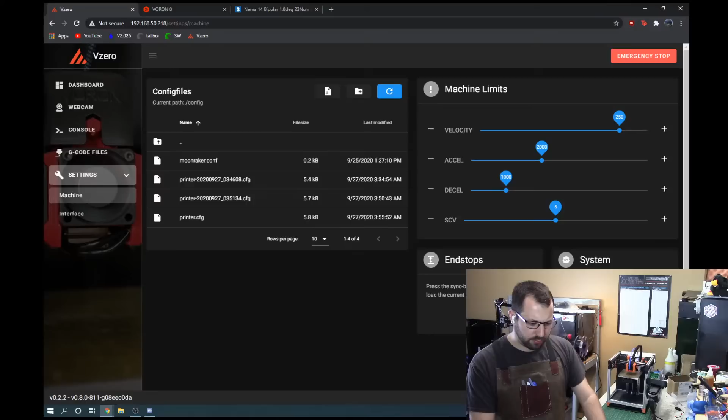So just start conservative and bump up until you have issues, then bump it back down. So I think we're okay there. Save. Firmware restart. Or was it restart I got to hit? I can never remember one or the other.

Okay, so we are good there. Home all.

Am I COVID-19 positive, no, but I do have a child in daycare. And when you have a child in daycare, they bring home the sniffles constantly, and you get it. More Canadian whiskey after the stream.

Okay, so what we need to do right now is validate our extruder extrusion, okay? So hopefully it's in the right direction. I wired it up like the default config, and I'm using the default config itself. So when I tell it to extrude 10 millimeters, it should at least push 10 millimeters.

Now, the easiest way to do this, if you have a Bowden setup, feed the filament, unhook the Bowden tube, feed the filament through so it's out, snip it, and then just tell it to extrude 100 millimeters, and then just scale off that.

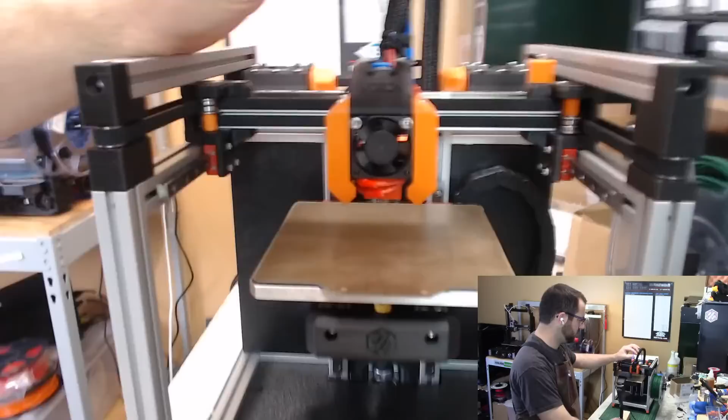So let's do this. G1 E 100 millimeters F90. I should have told it to go quicker. This is going to take a while. I should have put 300 instead of 90 or something.

No, it's still going. I told it to extrude a lot slower than it really should. And by a lot slower, I mean like god awfully slow. But it's extruding, so we're good there.

Are we done? Okay, I think we're done. So you tell it to extrude 10, I would go F like 300. You don't want to go too fast, because if you grind filament, you're not going to get an accurate reading. Same if you're skipping steps. You don't know if your extruder's tuned right yet for the rate of amps. So if you try to push too many steps per second and it starts skipping steps, and then you tune your extrusion steps based off incorrect data, yada yada yada, just go slow at first.

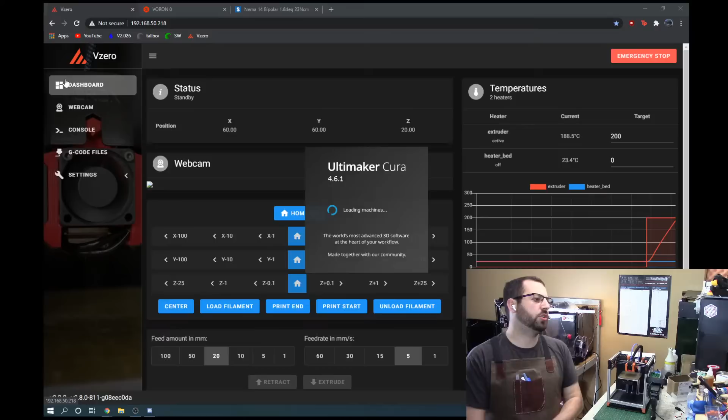Some sites say to measure through the heated hot end. Is that wrong? I've always been of the thinking that you want to give your printer the data raw. If you're extruding the plastic through your hot end and measuring based off that, you have issues with pressure at that point. Depending on the temperature of the hot end, the different types of plastic, the back pressure, how tight your gearing is, you're going to have a different amount of pressure for how much it feeds. So if you use that as your basis for measuring, you may be incorrect.

Versus the way I did it here, where there is zero pressure on the system at all. It is literally just moving filament through a Bowden tube, least resistance. So when your printer thinks it is extruding 50 millimeters of plastic, it is extruding 50 millimeters of plastic. If it's not giving you what you want in the result of the print, you change other slicing or other settings. But you shouldn't adjust your setting to compensate for something else that's throwing off your data, if you get what I'm saying.

It's kind of like adjusting your E-steps based on a printed part. You print out a calibration cube, and you start adjusting your steps per millimeter because your cube is 20.3 millimeters instead of 20 millimeters. Now, is that 0.3 millimeters because your flow is out? Your filament is not exactly whatever you plugged into your slicer. Your steps per millimeter for your extruder is out. The temperature wasn't correct when you printed it, so it expanded more, it shrunk more. There's so many variables involved.

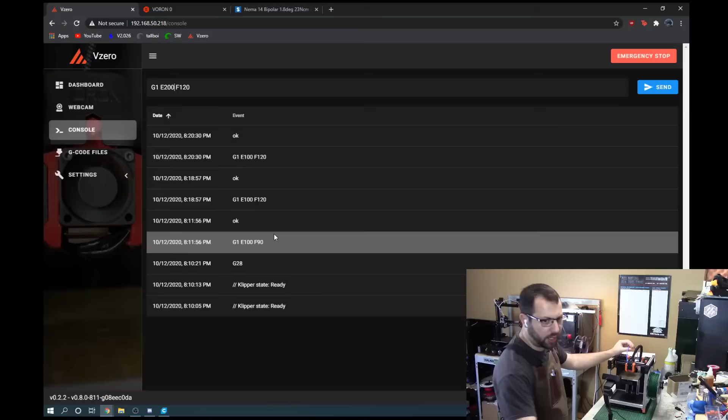Oh, I know — it's because it's already at 100. It's going off of absolute, so there we go. I forgot about that. A G1 move is moving to a location. So if you tell it G1 E100 F whatever, it'll move to E100. There we go. So if you try to tell it the same command again, it's already at that position. Yeah, it's in absolute mode.

So we are pushing some plastic out, some delicious green plastic. Okay, so we are good there. Set that to 0, and what I'm going to do is back it off. No, wrong button, I don't have — oh, extrude, there we go. Extrude 1 millimeter. Retract. I don't know why it's not letting me retract.

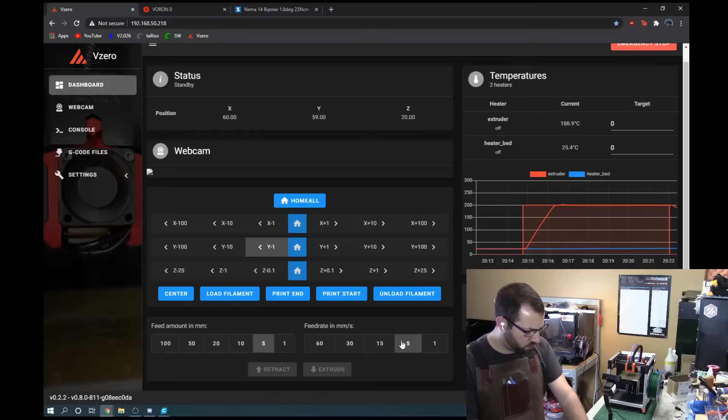Oh, because the hot end's off. That's why. Okay, whatever, good enough. Skip it for now.

So we have some plastic here, I'll get rid of that. There we go, good enough for a serial, boys. I'll take it.

Okay, let me catch up on chat here. Thanks for a quick question: I'm building a Voron 2.4 and I have a few BTT GTRs laying around.

So it calls for a Raspberry Pi 4 and SKRs. Everything you see in our recommendations is stuff we know works, okay? This guy has a Duet in it. The switch wire calls for a mini E3. Mine has an SKR 1.3. Tall boy down here on the ground, which you can't see, has a Taco Raven in it, which is a custom board we kind of designed like a year and a half ago that we only ever made like 20 of, so that's fully custom. And yeah, basically we recommend that, but if you already have hardware and you know how to set up a configuration, you can use whatever.

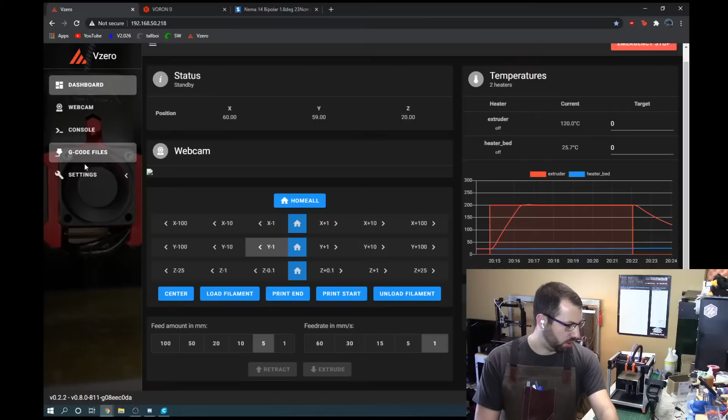So if you want to use GTRs, you can, you just got to know the pinouts. So when you go to do the configuration, in your printer config section, and you see these enable pin and direction pin, you know what pin you have to put in there to get the command that you want, essentially. So it's not complicated, and yeah, you can use a Raspberry 3.

This guy has a Pi 0 in it, so if a Pi 0 is running it fine, you can use a Raspberry 3. For Octoprint, a Pi 0 I would only recommend with mainsail.

Is there a way to get the old interface in Cura? I don't know, I've always used like the most up-to-date one. Actually right now I'm using 4.5 on my main computer, and this guy has like 4.6 installed.

Just reapplied my heater to my bed today. RTV is the messiest substance known to Earth. Tell me about it, I used to build hot-end silicone heat socks out of them. I have it somewhere... but yeah, I've... oh, here it is. Yep, I know that feel, bro.

What do you think of the Nova hotend? Which one's the Nova again? Let me Google that, I've looked at so many different designs.

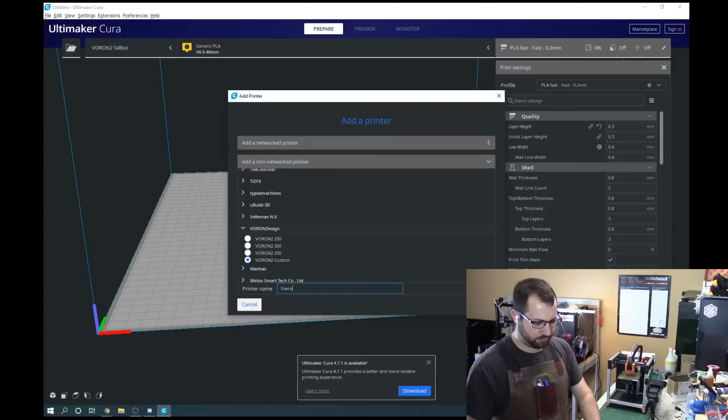Now, a lot of stuff applies to different slicers. Most of the settings are the same in different ones, they're just located in different areas. I like Cura because there's a ton of settings in it, you just have to know where to look for it. So we got 120 millimeters cubed. And yes, this is a slow computer. So for some reason, this part Cura is just horrible at, because it has to re-render the print volume or something every time you change one of these.

People will buy it because it's E3D, that's pretty much it. Honestly, my dream hot end, take a Mosquito heat break assembly because I like their form factor for the heater or the heat sink itself, which the rectangular kind of whatever they have there, not the circular one. So that, and put basically a V6 block, but mounted the same way a Dragon block is, so it's fixed with the thin heat sink. That's all, or a heat break. That's all you got to do. It doesn't need to be super complicated.

And keep the current nozzles that we use, unless they somehow come out with a better nozzle design. But I don't think they will, because of thermodynamics and the sizes we have to work with.

Rectangle bed, heated print volume, no. I don't know, every time I select RepRap it throws an error when it prints, so I'm just going to pick Marlin. I don't think it really matters.

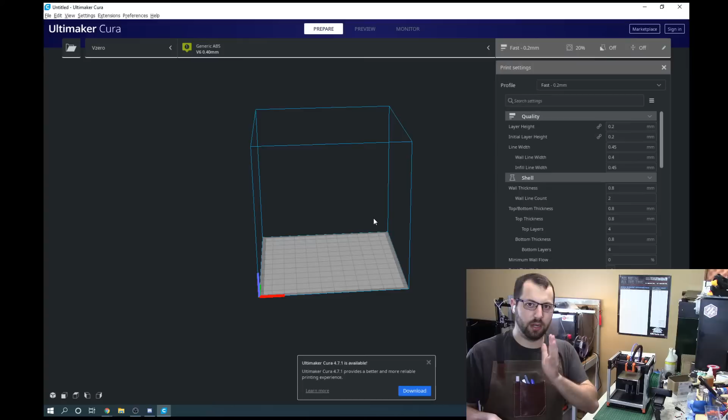So I haven't done input shaper, I haven't done tuning for the pressure advance, which we're going to have to do because this is a Bowden - short Bowden, but a Bowden. So what we're going to do is, plus thinner nozzles, steel is...

Triangle Labs, OEMs—no, I honestly just think it's one. There's probably only a few companies making stuff. Triangle Labs isn't the OEM, I do know that. I do know who makes a lot of Prusa's stuff though, and they might have a vendor channel.

So this is how I like to set things up. I'm one of those people that likes to give as much raw data and then adjust what needs to be adjusted. Everyone says your line width should be bigger than your nozzle, but that's your nozzle. So if you want to make 0.4mm lines, you tell it you have a 0.4mm nozzle, and if your lines aren't touching, you adjust something else. That's personally how I do it. I don't tell it I have a bigger nozzle than what I have. If I have a 0.4mm nozzle, I tell it I have a 0.4mm nozzle. So my line width, I go 0.4.

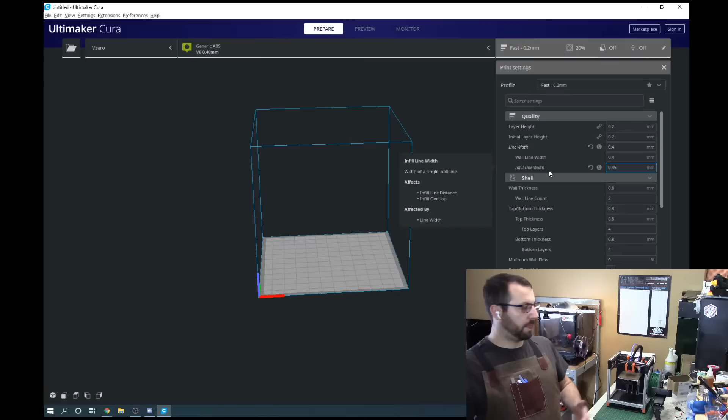Now something like infill, I over extrude for sure because it's infill—that's a lot of strength. So I over extrude infill, but my walls I make to data, and then my parts always come out good. I pretty much never really need to tune once I get everything dialed in.

Yeah, LDO. This has a Prusa bed, but I bought it from LDO. In that case, John, use metric.

Okay, so wall thickness—this is how many walls you want. So we're going to print a ye olde Cali cube, so we'll go with 2 walls, top layers, bottom layers. If you're printing Voron parts, all the manuals tell you the default settings. We're just printing a cube, so we don't really need to worry there.

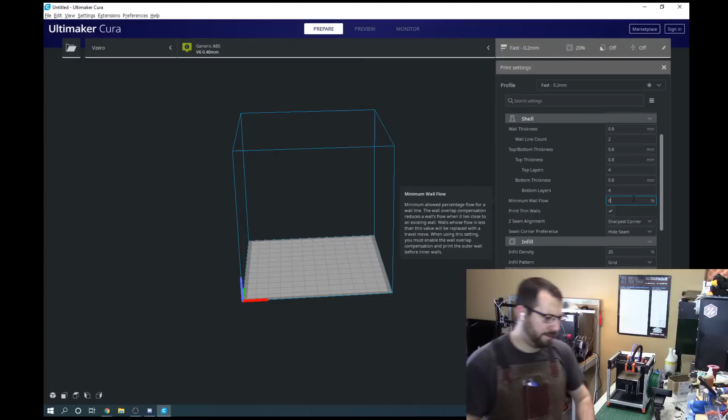Minimum wall flow—now this right here, I got to read this because I remember I had to change this for a good reason. I think this has to do with gaps, and I was having gaps at some point, so I've always put this at like 50, I believe. It's percentage flow for a wall line. I think this has to do with if you have 2 walls that come into each other—this just makes sure you get the correct amount. I was having gap issues, and I think this corrected it a while back.

Z-seam alignment, this is a big one. Whenever you see a print, depending on what you're printing, you may not care where your seams line up, where your start and end is. The better tuned your printer is, the less of an issue start and stop is. But what I like to do is just tell it to be the back. Unless there's something I really don't care about, I usually specify it to the back of my printer, and then whenever I put my parts down, I orientate them so my seam is on whatever part I don't care where the seam is.

So if I'm printing, you know, a little Charmander here, right, I'll have my seam in the back. So everything on the front, I never have to worry about a blob showing up in a bad spot because I know it's in the back. So personally that's what I do—I set it to the back unless it causes an issue, and then I'll set it for random or sharpest corner.

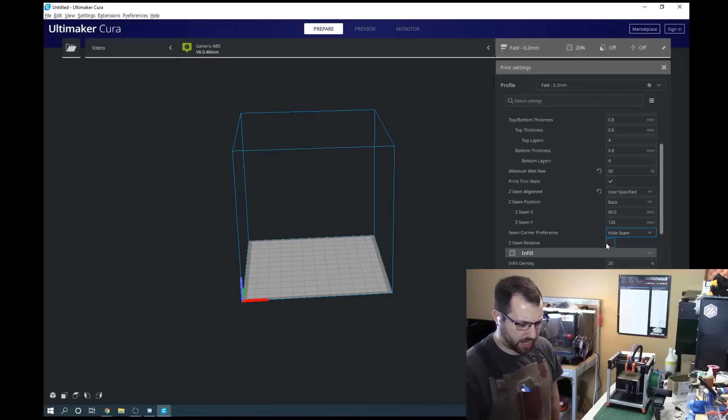So Z-seam, I usually put it in the back, and hide seam—yeah, seam relative, turn that on. This way, no matter where the part is on your print surface, it'll always be at the back. Personally that's what I like.

Infill—it depends on what I'm printing. There are basically three. Grid is probably the quickest for the most part. Cubic is pretty much grid, but it does a fancy pattern where it basically makes sideways squares, diamonds essentially. I'm a fan of cubic on infill heavy prints, and grid for just cosmetic stuff where you just need support. But my big favorite for a low infill percent print is gyroid.

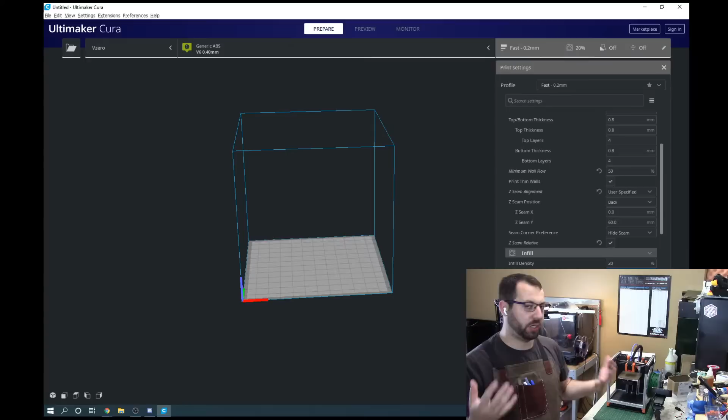Gyroid I found because of its curviness. If you're printing something big but you have low infill, either because it's such a big model you don't want to use a crap ton of filament, I find because of the weird pattern you have a much better chance of it being where you need it for other stuff to lay on. That Fantasy Castle print everyone prints works really well with low infill gyroid—everything just kind of lines up perfectly. But high infill, your printer will shake like mad, so cubic and gyroid are my two go-tos: cubic for high infill, gyroid for low.

Since we're printing a cube, we'll do gyroid at like 10%. And actually, let me throw in a cube here—I'm pretty sure I downloaded one at some point.

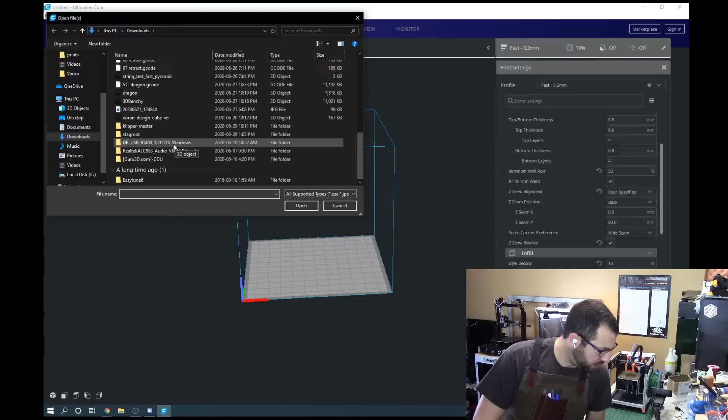Benchy? No, not Benchy, everyone's seen a Benchy. Do I not have the cube downloaded? I could have sworn I had the cube downloaded. Huh. Nope, I do not have the cube. Oh no. Mini Mando helmet.

Why do the mini one? Oh, I'm wearing glasses. Yeah, why do the mini one?

I printed this thing like 6 months ago. I still haven't finished it. It's been sitting primed, I gotta sand it all to hell, get all the layer lines out and shine it up. One day I'll get to that.

Okay, so community, GitHub. STLs, test prints, Voron Design Cube. Download it. Gyroid. Okay, so we have the cube downloaded. This thing takes up like the whole print volume.

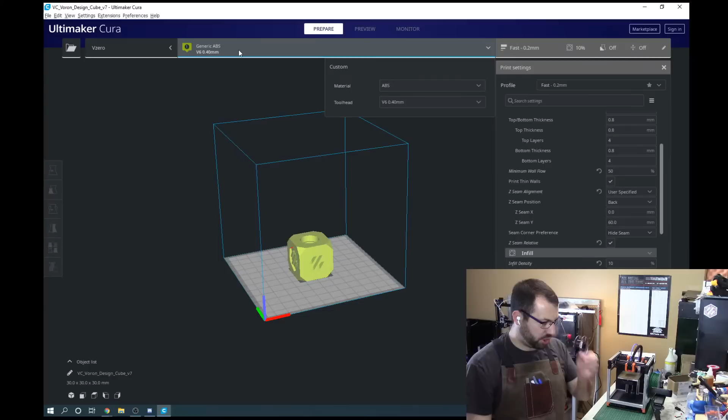Okay, so back to settings. So temperature - no, we are not printing generic ABS, we are printing generic PLA, the devil's plastic. Keep the settings I've changed.

I've seen Welding Geek's aluminum Mando helmet build. No, I haven't followed that channel. But for the helmet, the only problem is it's a very narrow field of view. You kind of do want a decent field of view, depending on what you're welding.

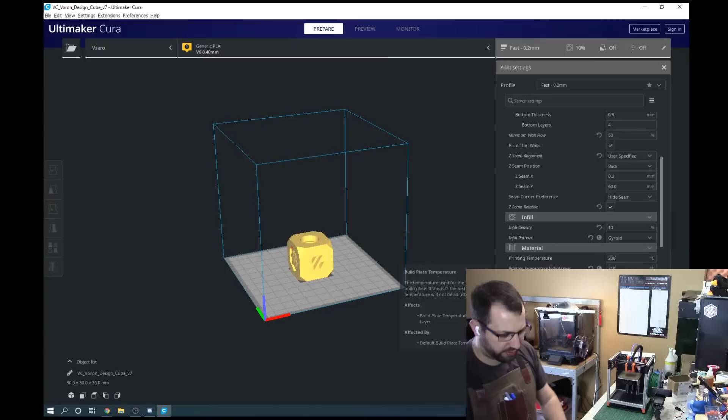Temperatures, so it's PLA, so we're going to go with like 200, and like 210 for the first layer. I always print my first layer about 5 or 10 degrees hotter. Build plate temperature, initial layer 60, after that we'll go to 55.

Okay, now print speeds. This is a Voron. Let me move my camera so you can see. Okay, so because this is a Voron, it defaults to 120 millimeters a second infill, 40 millimeters a second outer walls, 80 millimeters a second inner walls. That is pretty much default settings for all Vorons. For a V0, you can run it at that, and we are going to run it at that. But we're going to drop the accelerations down a little bit, and we'll move up from there. Once input shaper is tuned and you know the limits of your printer, you can start bumping those speeds up.

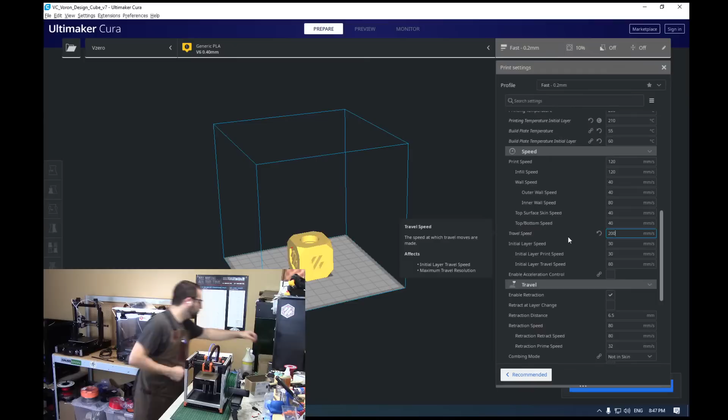So travel speed, though, we are going to drop that down to 200. I have found, now this is with a lot of testing with the smaller motors, which are... not that guy, got so many motors. So these were the motors originally designed for the V0. These are one step down from the current spec motors for the XYZ. And they work, but you start skipping pretty easily. Layer shifts are pretty common.

So this is such a small volume that even if you set your speeds to 300, odds are it's really not going to make much of a difference if you drop it to 200. So drop it to 200, because that one random burst of 300, if you're not set up right, might cause a skip step. Again, once you get everything tuned and have some hours on your machine, you can start adjusting stuff. Okay, initial print speed, 30 is fine. Initial travel speed, yeah sure, 80 is fine. Enable acceleration control, yes.

So we don't have input shaper, so I'm going to tweak some settings here. Now, once you have input shaper on and tuned, you can pretty much set your acceleration to like 5K, or whatever your printer can safely run at, and just let her go. But until then, you're going to want to set some settings, or if you're not running Klipper and input shaper for whatever reason, you're going to have to manually set your acceleration.

So, for example, this one back here is still running RepRap firmware. Eventually I'll get around to putting Klipper on it. But I usually run like 1200 to 1600 outer walls, 2000 inner walls, and like 4 or 5K for infill. Because infill, who cares what it looks like? As long as it's printing solidly, who cares if there's ripple in your infill? It's infill, you're never going to see it. Plus it saves time. Go with 1200.

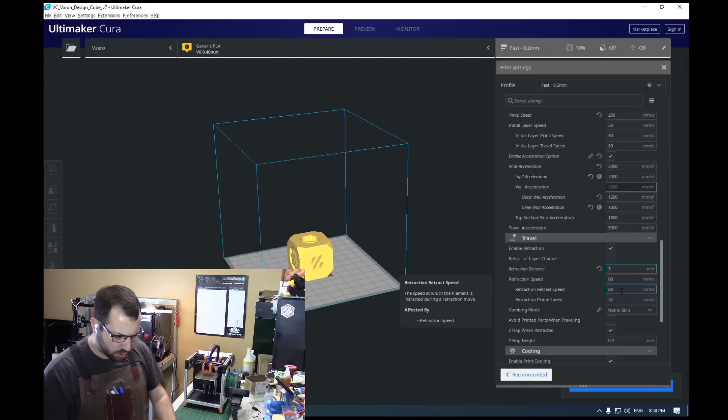Retraction speed, I don't like it that fast. I find 40 for retraction speed, and then roughly about 30 for your unretract, your prime speed, how fast it feeds it back in, works pretty good. And I run that on the afterburners as well, but on the afterburners it's obviously a much shorter retract.

Combing mode. This basically saves you a lot of time depending on what you are printing. When it does a travel move, you can tell it to stay within the printed part, and it won't do a retraction, it'll just move right there. That can save you some time. It can also add time because your printer might not be able to make the shortest direct movement anymore, it might have to do a Z-hop. And I always run Z-hop, I'm one of those people.

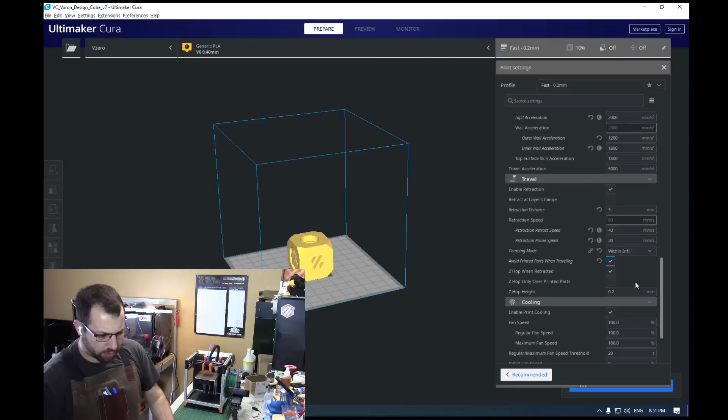So, combing mode within infill. That means if it can move somewhere and stay within infill, it'll stay within infill and move there versus going directly there. This also helps with blobbing and stringing, because every time you move outside the shell of your print, you risk bringing a wisp of plastic with you. So avoid printed parts when traveling, this can help a lot. I like having it on because if you have a print where it's curling up, this prevents a nozzle strike by accident, and nozzle strikes could damage the print and also knock it off your print surface.

Are you running ZHop when printing PETG? I do not print PETG, I'm an ABS and PLA guy. However, when I did print PETG, and with ABS too, I always run it, I always run ZHop. PETG though, I did find had a great benefit from using ZHop because that prevented all the nozzle boogers, the buildup of plastic on the nozzle. When I printed PETG on my Monoprice Select Mini way back in the day to print my Voron V1 parts, I ran it flat 30 millimeters a second, and every travel move had a 1 millimeter ZHop. It printed slow as hell, but every print finished perfectly, and there was no buildup on the nozzle. Having a plated nozzle that prevents buildup also helps, but I didn't have one of those at the time.

So ZHop only over printed parts. That means if we're going to travel from one point to another and we're not traveling over a printed part, we don't need to ZHop. ZHop height, I like to go with usually about 0.5 millimeters, but because of round numbers and OCD, we'll go with 0.6. Now, ZHop eats up a lot of time on lead screw printers because we don't have the super fast speeds that we have on Switchwire and the V1 or the V2.

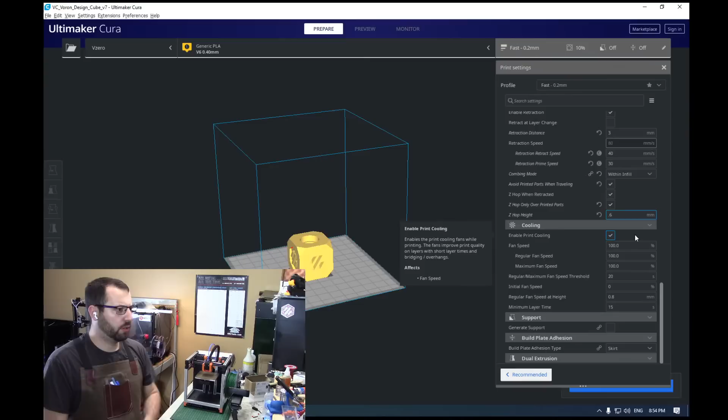So, don't get me wrong, PETG is kind of good. It's good for vase modes and anything you need to be watertight because it has really good layer adhesion. But if you can print ABS, especially enclosed, where your layer adhesion is good, you should be fine. ABS is an industry standard for a reason.

Okay, moving on. Printing fans. Yes, fans. PLA, you want fan, so usually I go like 80, and then I'll ramp up to 100 if needed.

I'm not going to go crazy max because it'll scream and it'll be loud on the stream, probably. Initial fan speed, zero. I don't like turning the fan on until a couple layers in. I want those first few layers to really bite to the bed, so you don't want to be going full fan speed right off the bat.

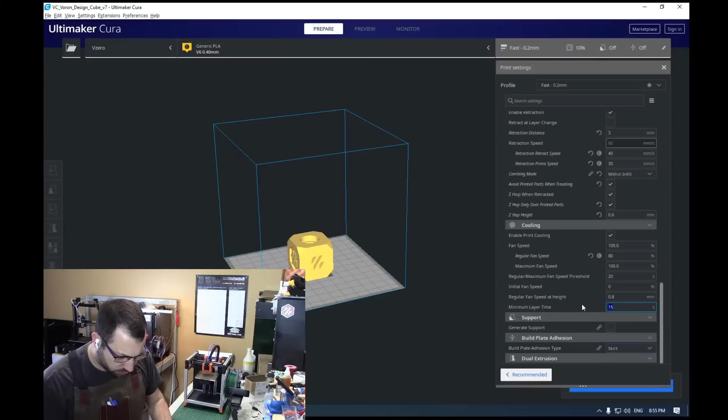So we'll start regular fan at like 3 millimeters. What Cura does is it ramps up. It'll start at 0, then 5, then 10, then 15, or however many divisions it takes.

Can ASA be used instead of ABS? Yes, it can. ASA is basically ABS that's just chemically formulated to resist UV. For the most part, for 99% of applications, they are exactly the same, and material-wise, they are pretty much exactly the same, just a few different chemicals are swapped out. ASA was made because if you ever look at an old Chrysler and the bumper is all weird colored because of UV radiation melting it or discoloring it, that's why ASA exists. ABS gets eaten up by UV radiation, basically. So mechanically, they're pretty much the same, within 95 to 99% of each other.

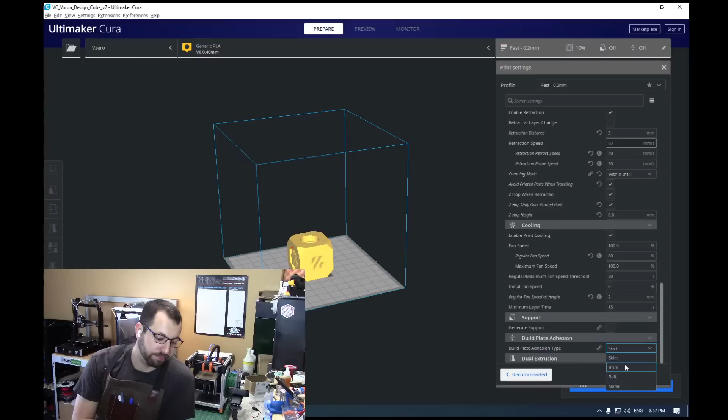Support, we do not need support. So skirt, brim, raft. A skirt is basically a fancy prime line around everything. A brim sticks out past it. Brim is good if you are printing ABS on a printer that literally just has a cardboard box over it, or unenclosed but in a room with no draft, or you don't have a PEI bed surface using some glue stick or something, or your bed temperature can't get that hot. Don't be afraid to use a brim, because it will help you with warping and parts popping off your bed. If you're having issues with prints sticking to your bed, there is no shame in using a brim. They peel off relatively easy, and then you just go in with like an X-Acto and trim off any excess.

If you can find eSun ABS Plus, yes, that is pretty much my go-to black ABS. I like KVP, but I can't get KVP in Canada. But for just pure reliability, it's amazing plastic, very newbie friendly. And dual extrusion, do not have.

So those are the base settings in Cura. Now the thing with Cura is it doesn't give you all the settings. So you have to click this little gear here, and it's under every setting. If you click it under cooling, it'll pull up all the extra settings. For quality, there's a ton of extra settings. If you look at my main profile on my main computer upstairs, I have 4 or 5 times as many settings available because I've turned them on. You can change outer line width, inner line width, prime tower sizes, all kinds of different settings.

I'm not going to go into all of them right now, but I wanted to cover the base settings, stuff that you're commonly going to see, and stuff that will be common on pretty much all slicers. Some stuff like print inner walls before outer walls, you may want to turn that on or off depending on the object you're printing. For example, if you're printing something with a lot of overhangs, you want to print inner walls before outer walls. But if you print outer walls first, dimensionally they are slightly better. It really depends. Usually I print inner walls first just because it makes overhangs come out so much easier, because instead of printing on nothing or barely anything, at least you have something on the one side for it to kind of stick to. So I'm going to turn that on.

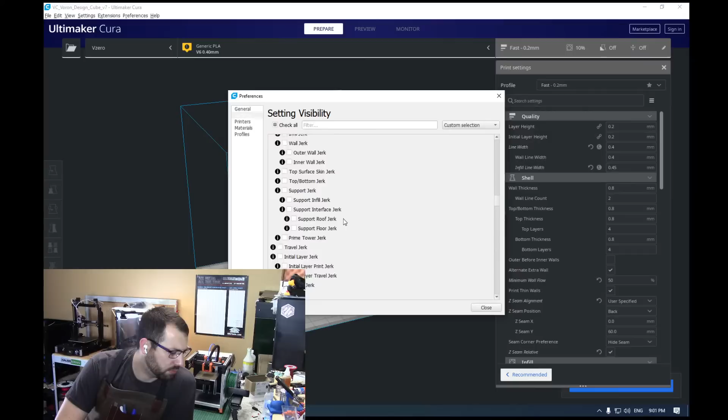For your speeds, you can change all kinds of speed settings - Z-hop speeds, which I don't know what it defaults to, but I'm going to bump that up for sure. So there is quite a bit in here - there's tons of settings.

Minimum layer time is something you really want to pay attention to, especially in ABS - I'll get into that later. But with ABS, you don't want to cool it too quick, and you want extrusion to be consistent.

So what that means for ABS, say you have to print one object, okay? This is not how it prints, but you have a big fat bottom area, and then you got this little spire here. So if I was printing this by itself with a minimum layer time - because if I tried to print too quickly with ABS, the details don't turn out well. You want it to naturally cool down to ambient temperature.

You want it to naturally cool down to ambient temperature on its own, basically, and not be hitting it with a fan, or too much of a fan, or forcing it to cool too quick, because it'll constrict at a different rate. This can cause a weaker part and a dimensionally inaccurate part.

So what I like to do is you can turn on minimum layer time for ABS. What that'll do is it'll slow your print head down so that your layers take a minimum amount of time to finish. The problem with that is you will see it in your print - when it slows down, the plastic will be extruded differently than it was previously, and you will have a visible blemish in your part.

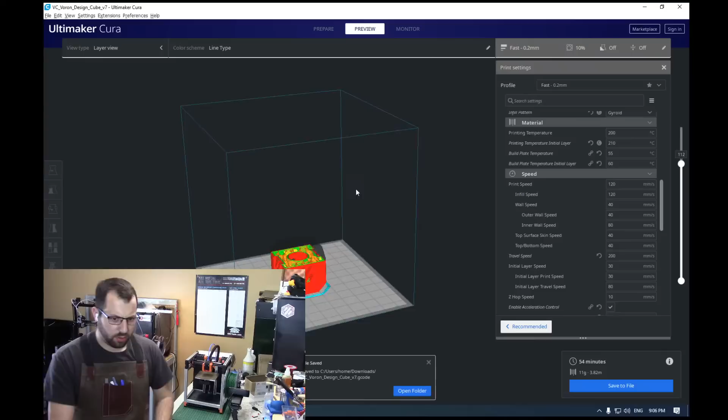So let's see here. Now we do have a fancy cube here with all this extra stuff in the middle. For those that don't know, you can fit a bearing in here and another bearing in the other side, and that's basically to check the dimensional accuracy of your printed parts, how good it is for overhang, dimensional accuracy for the walls, how good it looks on the sides, yada yada yada. So there's quite a bit of test built into this one little cube.

So V0, there we go. Okay, save, I don't know what I changed there, whatever. Restart the firmware. G-code. I have a cube, I never printed that cube. Delete that cube, oh yeah, I didn't print it last week. Upload.

Where did I put it? Oh, it's in downloads probably. Yeah. Should set it for 300 millimeters a second. Well, once I get input shaper tuned on here, we'll see how fast I can push it.

So, do you want to start? Yes.

So where some other 3D printer channels have fancy setups for cameras and tripods and stuff, I do have one tripod, this camera's on a tripod. For our up-close camera today, we will be using a Logitech C920 with a printed arm on a piece of wood. There we go. Ta-da. This is an improvement from our previous first print video where we had a Logitech C920 on a printed arm held in place by a spool of filament.

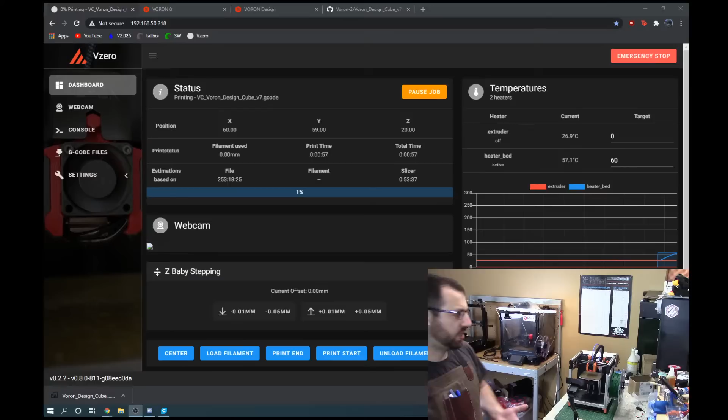So this is boring, bed's just heating up right now. Now, this is fully open, I'm not going to worry about soaking it like we normally do, where we normally do the 10-minute heat soak for the bed. This is a small enough bed, and I'm only printing PLA, I'm pretty much just gonna give her and go.

There is a setting where you can tell it to lift the tool head and move it to another location. The problem with that way of doing it, and I have done that method in the past, is it'll print at its normal speed, and then it'll go wait at a location for 8 seconds. The problem is it doesn't turn off the hot end, so the hot end will just ooze for those 8 seconds, and then when you go to print back in, it'll have that little dribble of plastic, and it turns out yucky looking.

Your fan sounds like a weed whacker. That doesn't sound that bad.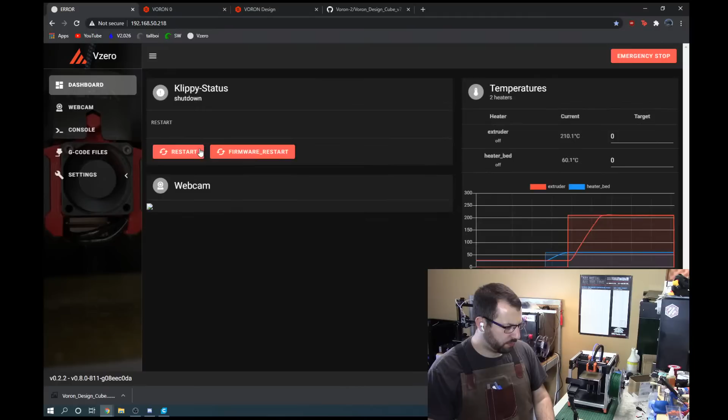Yeah, where's my movement? Ray, where did my movements go? Ray! I don't have a webcam. Console. G-code files. Refresh. Oh yeah, Mainsail, I gotta refresh a lot. Currently. Oh, there it is. Home all.

Yeah, it's fine right now for just, I want to print, but it'll get better over time. Like if you're used to duet web control, at least this supports webcams. I don't have one plugged in, but actually, Ray, if I were to plug in a webcam right now, would it automatically detect it, or do I have to change some default settings first?

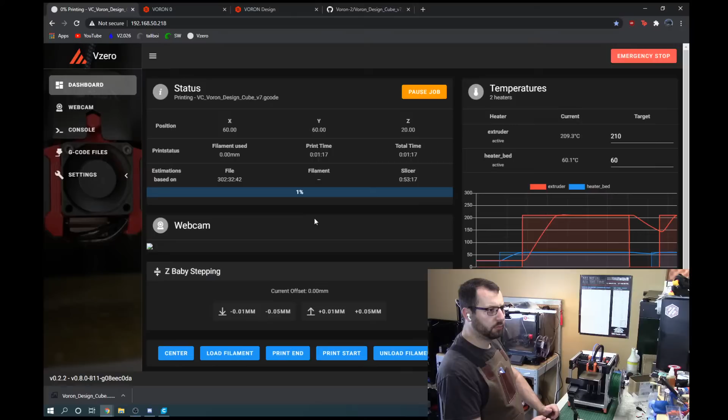Well, remember, Mainsail is not duet web control. It may look the same, but from the ground up, it's completely different. I think it just uses Vue. Okay, so that's not too bad. But yeah, it just looks like duet web control. It shares none of the same programming or whatever.

Yes, that is one thing. We haven't fully tested it with a Pi Zero with a webcam. I have two webcams. One's USB and one's ribbon cable. So I don't know which one I'm going to put in.

Why aren't you sticking? Is it too high? You know what? One second here. Pause job. Cancel.

I don't think I cleaned my bed. I might have grease on it. Yeah, it's not really sticking too well.

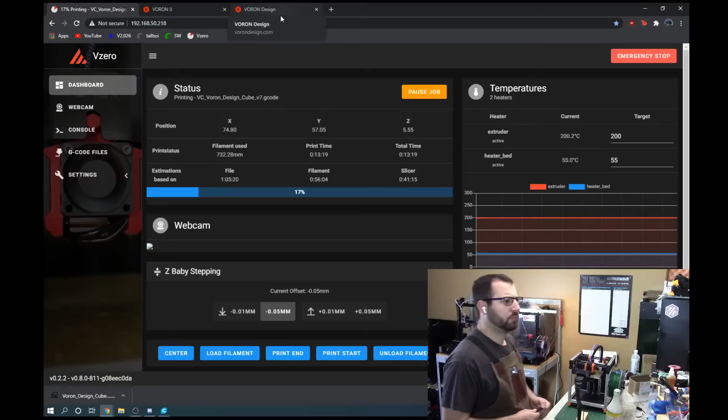Remember, if you go look in the manual for V0 - let me see here, I think it is in the manual, which I've probably downloaded a million times. You can watch that while I find it here.

So for V0, for those that don't know, the design of it pretty much started back in early 2019, I believe, late 2018 early 2019. Mr. Cat Food himself started designing it, and then it got to a point and just kind of sat for months, almost half a year, I want to say, and then Nemgrea picked it up and basically started almost from scratch and brought it home. We had our first functioning ones in January of this year, and then whenever it was pushed live is when it was pushed live.

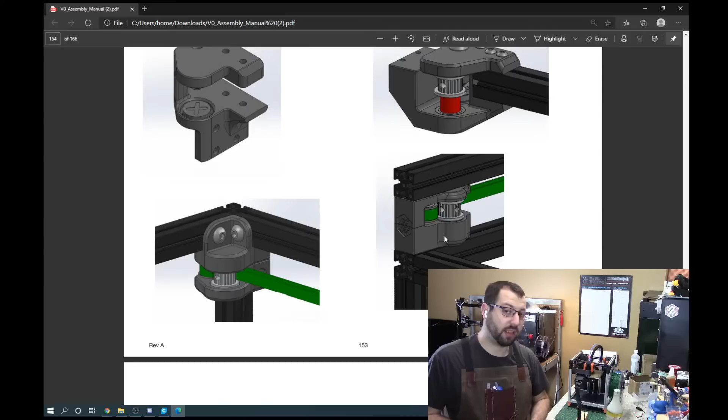I wish I had saved some of these parts - I'll pull up some videos here. I have some videos I didn't make public on my YouTube account of testing some of the early designs, but for those that don't know, it went through a lot. Yeah, the development graveyard - so that's my hand right there, and that is the bed. The original bed was printed, and then we're like, wait, let's use one extrusion, let's use 3 extrusions. The original design used LM6UU bearings and 6mm rods and 4 extrusions, and everything else was going to be printed, and it was going to be a belted Z.

Yes, you can print every functional part required to build a functional Voron, any of them, on a V0. That's why it's a 120mm bed. And no, it is not a Prusa Mini competitor, it's more of a Dice analog. Because the Dice is all custom components and expensive, we wanted to basically be able to build a Dice-off using commercial off-the-shelf parts for cheap.

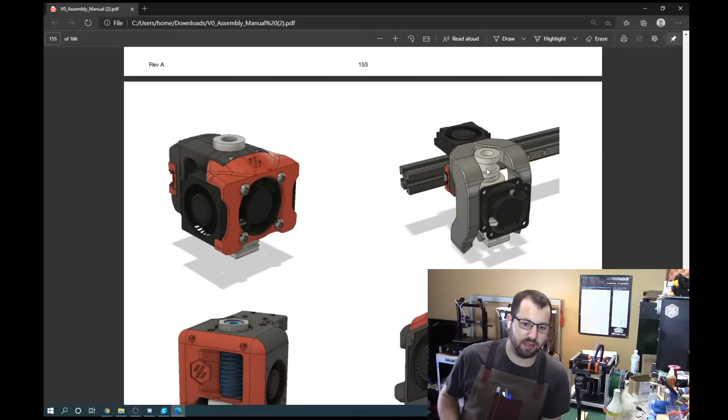Unfortunately, the Monoprice is dead. The way it's designed isn't conducive to modification and fixing of the frame. I had a lot of seized bearings on it. Some of the rods literally had grooves worn in them from seized bearings. The hot end was dead on it. It had an M4 threaded rod for its Z lead screw, so it wasn't even a real lead screw, just an M4 rod in a nut. So your steps were like 0.1 or 0.0013 millimeters, some stupid oddball number like that. So unfortunately, it's dead.

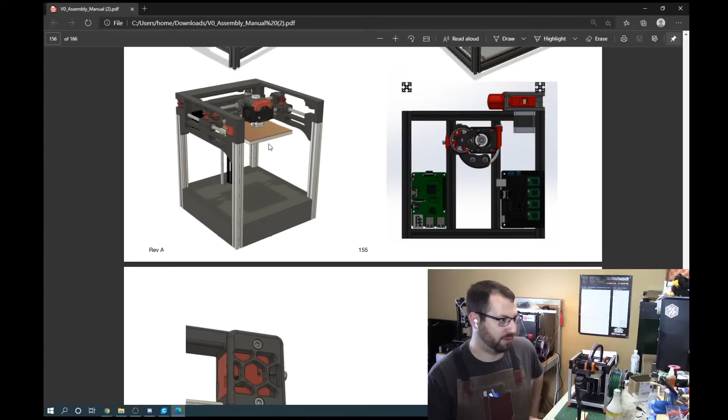Oh no. I have one collecting dust. I'll send it, don't worry about it man. If anything, I got that crappy i3, I'll probably finish it at some point and use that as my base model printer to show how to do ABS for newbies. But yeah, so this is part of the development graveyard.

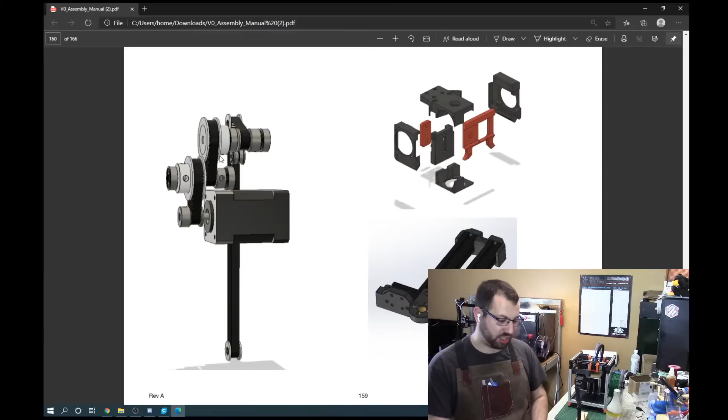Pillow block, I had this functional. Another first revision of jetpack, I believe. More first revision parts. Oh yeah, there's the original Z, belted Z, for those that want to trip down memory lane. So yeah, this is why we went to a lead screw, because a lead screw is actually cheaper and more compact than all the random stuff we were trying to figure out.

Some of the tool head designs. Yeah, for scale, originally it had a 100mm bed. So the actual first revision had a 100mm bed, and that's what the bed looked like with the tool head. So that's a 100mm bed. And then we went to 120 because the Monoprice Select Mini is a thing, and because it is a thing, there's a lot of stuff for 120mm beds, including flex plates.

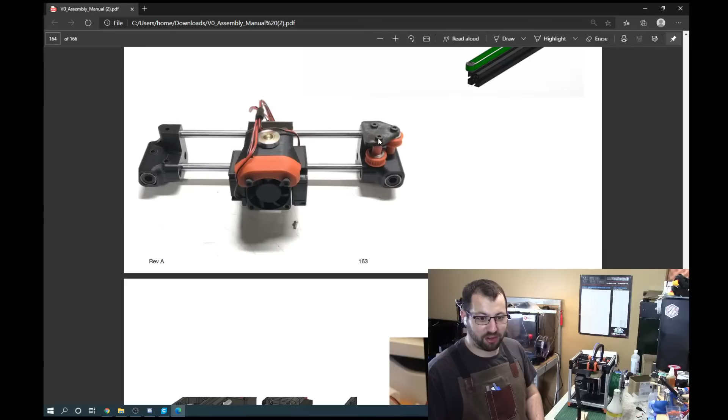I actually like this tool head design with the fans on the side, but it was bulky. Oh yeah, and dreaded printed idlers, we're gonna make a return. Oh yeah, and those, if you get bored with KW10 micro switches, you can make little robots out of them. Oh yeah, and also was going to use 4mm belt, which... oh my god, here, let me go back so you can watch the print, because I think this is it of pictures.

Let me go digging here. I gotta dig for this. I know I have it somewhere. Oh, there it is.

Okay, so for those that don't know, and for those on the dev team, you wave bye-bye to money, because the dev process, you see banding? Yeah, I'll wait till we get more of it done. The dev process is quite long on some of these machines. Switchwire was probably the quickest from start to stop, and probably had the least amount of parts designed into the machine, and then a revision happened after we ordered it, and parts showed up and went straight into the scrap bin.

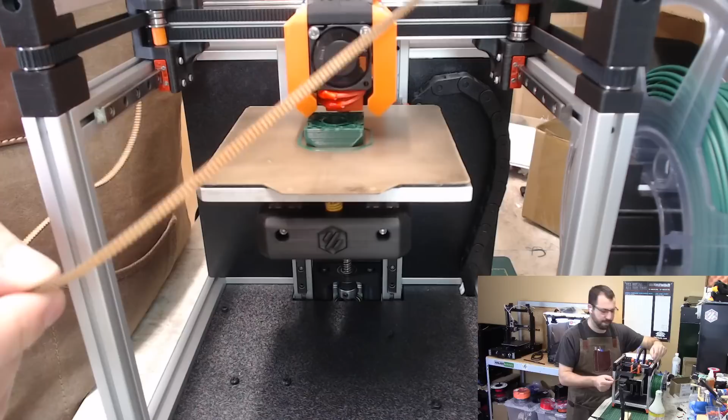But at one point, this guy was using this belt. It's this 4mm 2GT belt, from some random printer I believe, and we found this on eBay. Or no, it's not even that, it's an S2M4E belt, but it's 4mm, and it's made in Japan. But yeah, we were going to use this for the belting because it's super high quality and it's from some random printer.

You see banding? So far it looks more like extrusion. Oh yeah, I see it. Oh well, we'll worry about that later. But yeah, that was going to be the belt. I think I paid like 15 bucks for this, and it's been in the pile. You got to remember, you're seeing it under overhead lighting, which is the harshest lighting on a printer or on a print.

Let's see here. Yeah, switchwire was about 3 months from start to stop, and that's including a complete redesign because RCF originally designed it as a capstan printer. That's why it's called switchwire, because originally it had wires instead of belt.

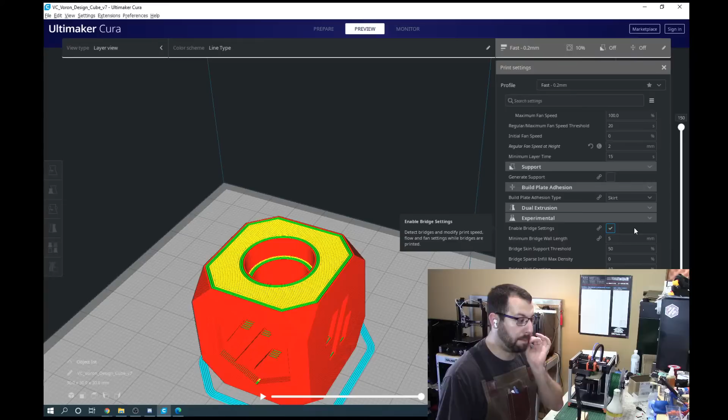You go down to experimental - there's all these settings that automatically adjust speeds, feeds, and fan for bridges and overhangs, and they pull out some amazing bridges and overhangs. That's one of the reasons I love Cura. You'll freak out because your fan kicks off and you think it died, but what it's doing is automatically adjusting how the machine behaves for overhangs and bridges, and they come out immaculate - it'll do quick little span lines, then build a bridge over it.

The bridge settings on Cura are really good, I do like them. Let me show you, though it'll be hard to see here. This was a Calicube test from another print. You can't get light in there so it looks too dark, but basically it's flat right across - it's a perfect bridge.

Thoughts on adding weight to the frame of the printer to dampen vibration and resonance to improve prints on bed-slinger machines: input shaper basically corrects for, or cancels out, resonance. It'll allow you to get to higher speeds like 5, 6, 7K. But you still want your printer mounted well because you're slinging mass around - the more weight you're moving, the bigger your printer, the faster it's going, the more it'll resonate.

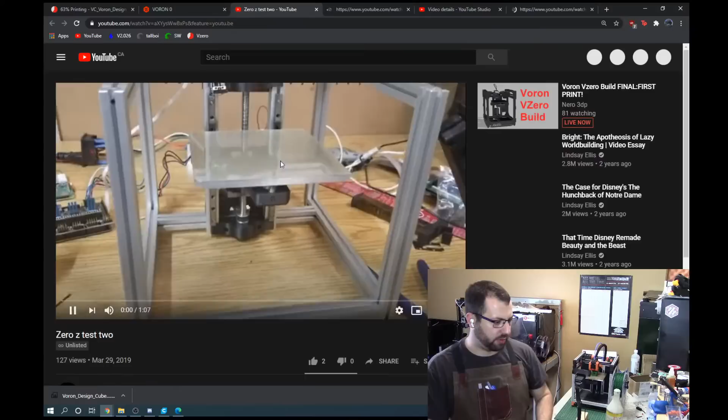Okay, so I'm going to pull up some memory lane videos here. This is the original.

Come on, wow, slow. As I said, I need a new computer. It's working, but it's chooching. Maybe 480p? It's not the internet, it's the computer itself. Immerse it in mineral oil.

Okay, so this is like original V0.0 or V0 Z moving with the printed. And it's on ramps, originally this thing had ramps. So there's ye oldie. So that is that.

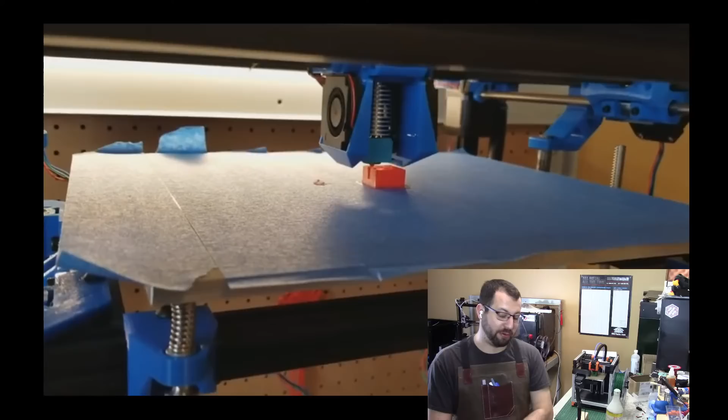Now, in terms of serials, how I said, if you go back a couple weeks, I posted a video, V2 Ascension I think I called it, which was a serial for Tallboy. This is when it was originally a V1, this was my serial video. So if you want to critique anything about your serial videos, this was my serial video for V1 Tallboy.

Look at that. Ramps, A4988s, wires everywhere. Mark 8 extruder, literally a dowel zip tied to something to hold it. Unfocused camera, a BLTouch, blue tape on the bed.

Yeah. Wires hanging down everywhere. Yeah, this was my first Voron. Now, to be fair, I redid it.

Okay, the other video played through, and now I was watching Joel do a tour of Prusa. To be fair, I redid my serial video after I went through and rebuilt the entire machine in ABS, made it look proper, enclosed the electronics. That's a BMG Mobius before we had the Mobius 3. So that's it all cleaned up.

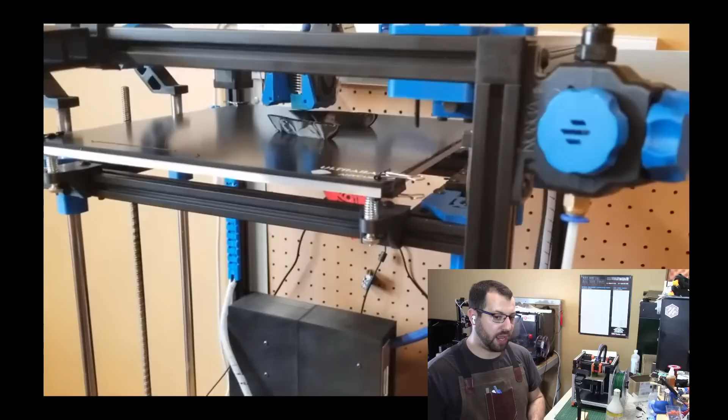Are fan speeds used for ABS cooling much? I usually run a 10 to 20% fan for ABS, but pretty much with ABS you really only want to run a fan if your printer is enclosed and you have high ambient temperatures. So if your printer is out in the open, or it's an Ender 3 with a towel draped over it, don't run a fan. But if you are fully enclosed and your printer is dialed in, yeah, you can run a 10 to 20% fan on low, and it's basically just enough so that it gives you crisper edges and your overhangs are a little bit cleaner. It helps with details, just makes ABS print a little bit better. It's not really required, but it does help a bit. So yeah, you don't want to run a lot of fan, you're not running like 50% or 40%.

It's funny, when you look at the print from certain angles it looks fine. Direct overhead lighting makes pretty much every print look bad. Right now I've got a shop light right above shining straight down, and the camera's looking flat on, so this is literally worst case for print quality.

Yeah, the Ultra Base, I think I have it under here. Yeah, I still have the Ultra Base, it's right here, covered in dust. It sits on the stack of 4 mirrors that I bought from Lowe's. They used to be 12 by 12 inch mirrors until I started taking chunks out of them.

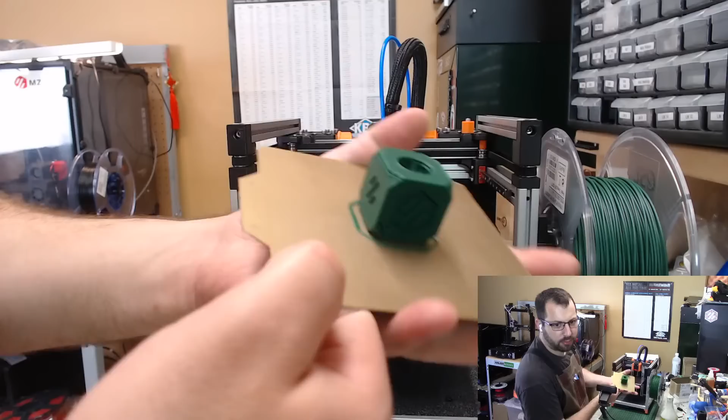Okay, so we are done. Yes, custom cardboard or trash plastic. So as you can see, we do have a little bit of a layer shift there, obviously from flipping it upside down twice, or three times actually. But...

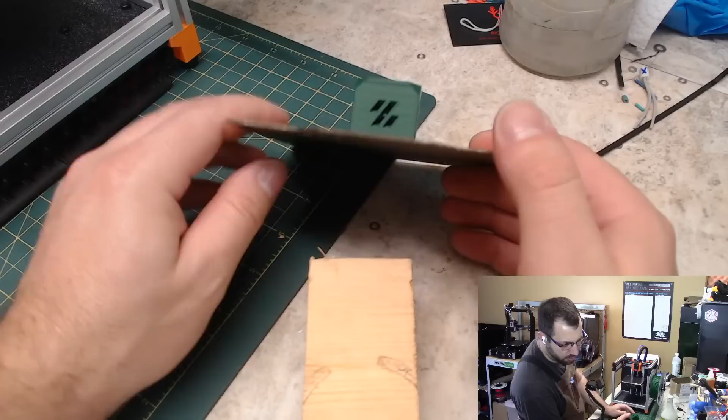Now here's the thing with lighting. Certain lights— let me get this on the main camera so I can see it better. From certain angles, it looks fine, but as soon as you hit it with that overhead lighting, ugh. Like that looks really good. Ugh. That looks really good. Ugh. But honestly, for literally, this is the first thing to come off this printer.

That was just assembled. Like literally, this is the first thing printed on this printer, a printer built from scratch and parts, that hasn't been tuned, hasn't been tweaked, has an unspec lead screw that induces a slight wobble to it. My flow isn't calculated, it's got no pressure advance, it's got no input shaper, accelerations aren't tuned, speeds aren't tuned, motors aren't properly tuned.

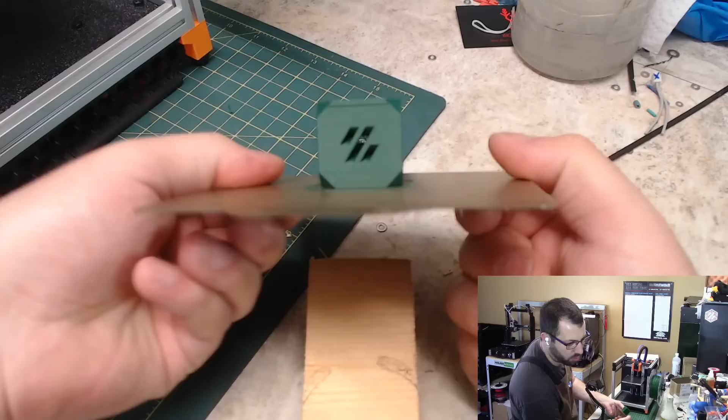And then flex plate magic. Ta-da. So there we go. And just to compare, I'm pretty sure this was V2 Calicube.

I can't remember, did I use black filament for Tallboy? Now this one you can see, that's another thing I like about Gyroid, it doesn't bleed through as easily as grid infill. Grid infill bleeds through really easily, I find. So this is another reason I like belted Z, you never have to worry about lead screw wobble on a belted Z.

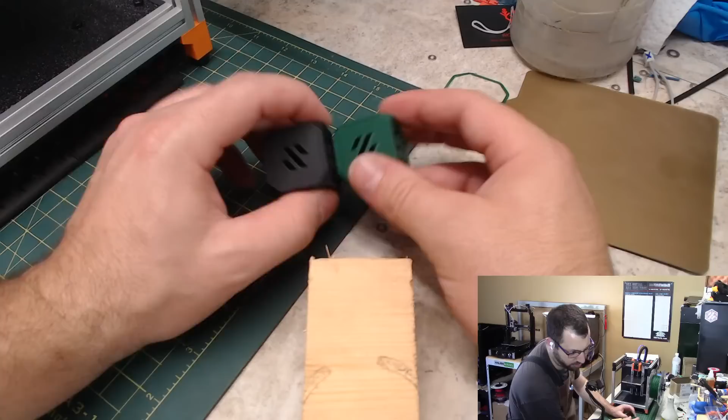And obviously this printer's all pressure advance tuned and everything, I think. Actually, no, I don't have the second— I don't have the other Calicube. Oh, maybe I do. Okay, dang it. So this is the Calicube off of Tallboy's first print, I believe.

But after— I can't remember. Yeah, the one on the left here, this is Tallboy's first print, because you can see the glue on the bottom. So just to compare the two: this is the very first print off of V2.4, and the very first print off of a V0.

And they're actually a slightly different model, but they're pretty close. Like obviously this one's Bowden, this one's direct feed, so obviously they're going to need more tuning, but direct feed gives you better results out of the box. So yeah, put the bed back on.

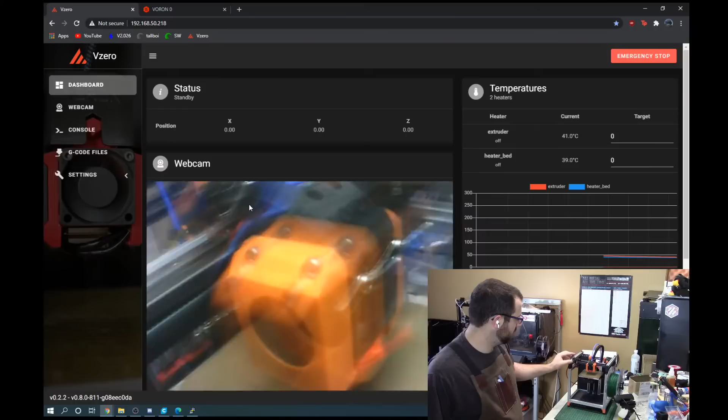There's too many USB ports. Oh, there we go. So this is the super shitty $4... oh my god. Well, this is what a $4 webcam looks like, guys.

So that's how you add a webcam, by the way. You just plug it in and reboot, and it should automatically come up. There is a file in the SD card after you format it for Mainsail OS where you have to set it up, like Octoprint, where you configure the webcam.

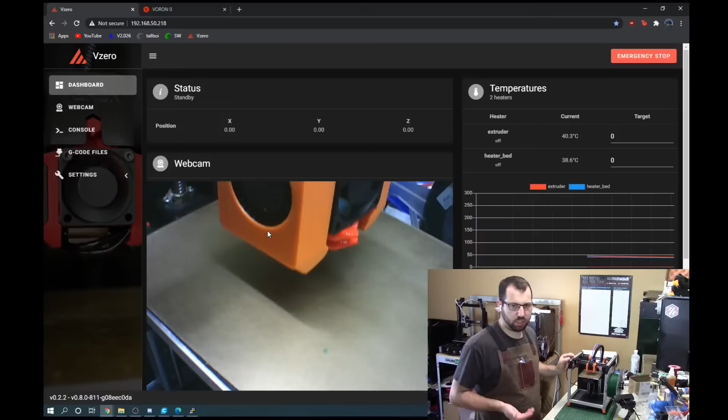But the thing is, this is really all you need for print monitoring. You just want to be able to watch the print, to see what spaghetti is, unless you're trying to make fancy time-lapse videos, in which case you should use a separate camera. I'm thinking of mounting this guy right there, because that gives me enough of a view to see pretty much the majority of the print bed, and the tool head won't hit it. I can tuck the wire in there too. Yeah, so that works fine.

Okay, what is the command to check the status of a Raspberry Pi, or a sudo command to check how much I'm using, like load or something? I'm sure you Linux people know that, to see how much I'm taxing this thing. Top -- is that a command? Okay, so I'm using 10% CPU. Really? That's it?

Oh no, that's percent. Wait, I'm looking at the wrong thing. 8.8%? Is that right? Is that what I'm seeing there, 8% CPU usage? Yeah, that's less than I expected. It's running MJPG streamer, right?

Terrence, will Spaghetti Detective work with Mainsail? At this time, none of the Octoprint plugins work. This is a completely different environment than Octoprint. There's Moonraker, which is the API that talks to Klipper, and there is some work happening -- I know Spaghetti Detective is a big one -- on getting ported over, essentially.

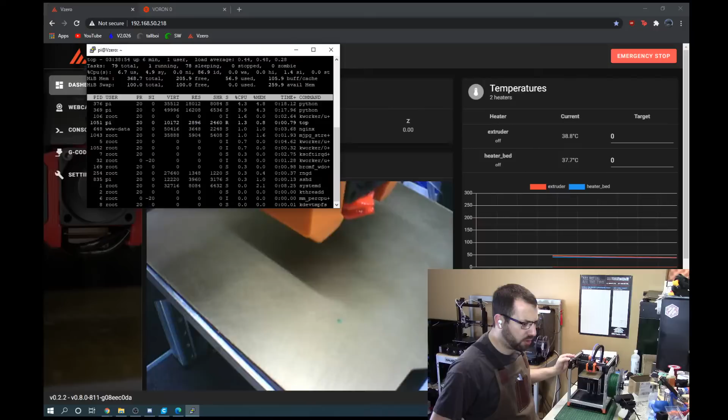Now, granted, this is a $4 webcam, so let me try a better webcam. Buy a webcam. You're plugged in -- how long is your cable? That's a long cable, that'll do. Come here.

Okay, how do I get out of this? Escape. Whatever, I'll just load it again. Okay, so now I plugged a C920 into it, like an actual webcam, instead of a $4 China special.

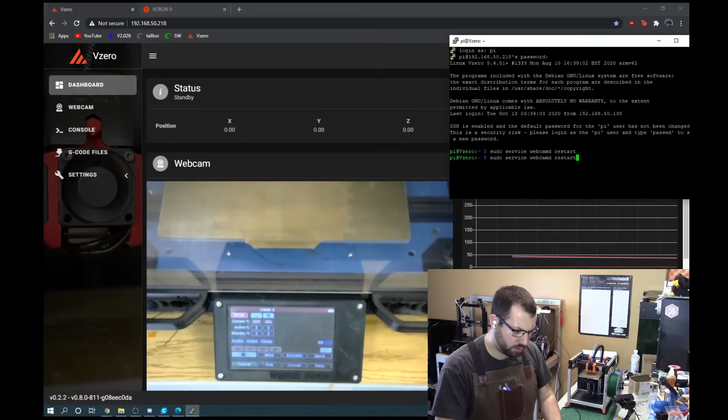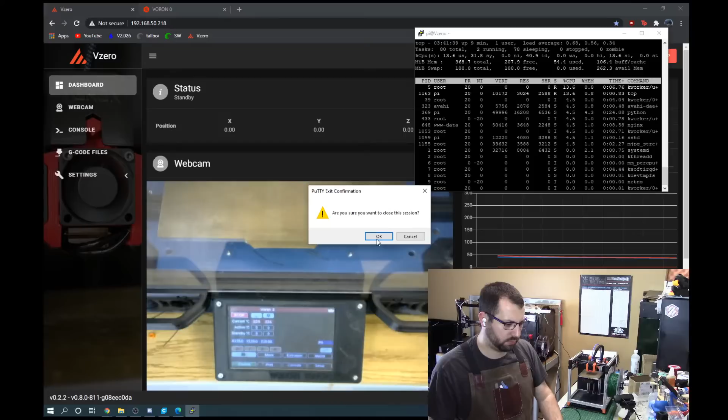Okay, let me try htop. How do I escape this? Get out of there, close. Htop. Q, no. How do I escape, escape... fuck off. Q? Oh, okay, or I could just reload. Nope, not Tallboy, Tallboy's offline.

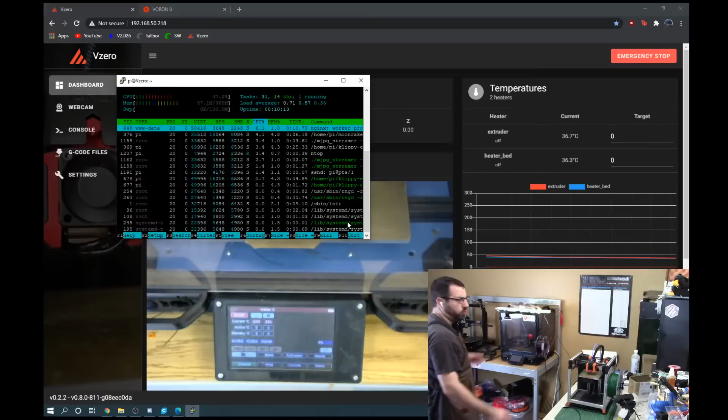Okay, htop. Okay, so 37 -- oh, that's not bad. So yeah, 40% with a C920. Oh wow, look at that frame rate too. So, that's not bad, actually.

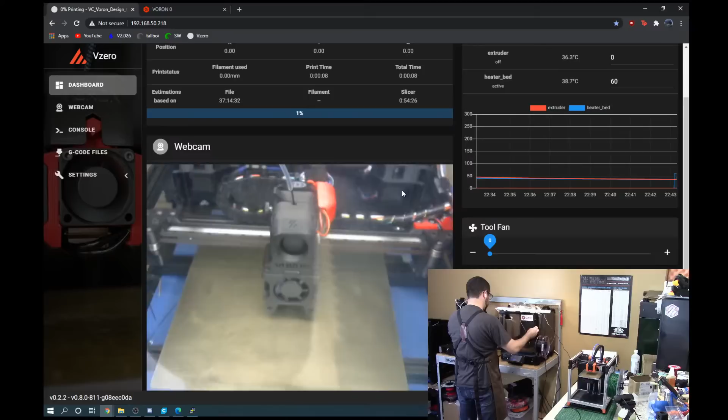Yeah, so he's handling that pretty well. Now the thing is, it's not widescreen -- this is a widescreen camera. Oh, it defaults to 480p. That's still not bad, honestly.

Okay, so let's see, I'm firing up a print right now. I got the C920 running. You know, it's not looking at the right printer.

So see, we're learning stuff. At first we thought we might have to plug in the webcam via a ribbon cable, but if we're using not even 50% load on a Raspberry Pi Zero while printing with a webcam at 480p, that's perfectly usable to make sure you're not getting spaghetti.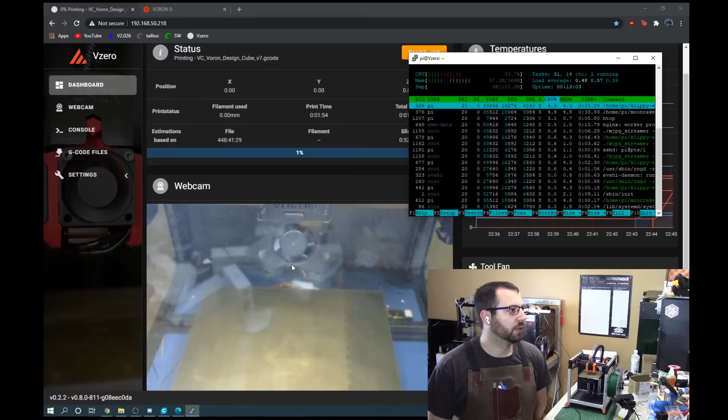Now I'd have to pull the SD card, I think, to modify the file to get 1080p. I'm sure 1080p would probably put a bigger load on it, because the C920 has a built-in encoder, I think. I'm not 100% sure. I don't know a lot about the tech.

Well, yeah, it'll depend on... I can modify it by SSH. Well, if you know the command, because I do not know Linux at all.

So we'll run a little bit late tonight because we're doing a little bit of Mainsail testing here live.

Yeah, the print's going, it's heating up. So it's just the Cali Cube again. This time I won't flip it upside down.

So it's sitting at 30%, 32. Like we're not using, what, 57 megabytes of 369 megabytes, yay Pi Zero.

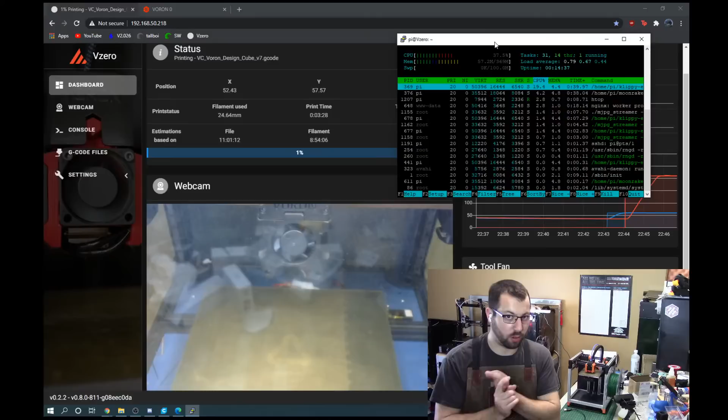Honestly, okay Raspberry, if somebody knows anyone at Raspberry, make a Raspberry Pi Zero with a dual or quad core on it with 2 USB ports. That's all I want, and Wi-Fi. Okay, that's all I want. Maybe a gig of RAM. Okay, it'd be perfect.

So right now you have to go through like UART to get USB and SKR hooked up, because right now there's only one USB. So I had to go through UART, which if you watched last week's stream, or 2 weeks ago stream, yeah, it's sitting like 25%.

So it's really not taxing this a lot. This is good to know.

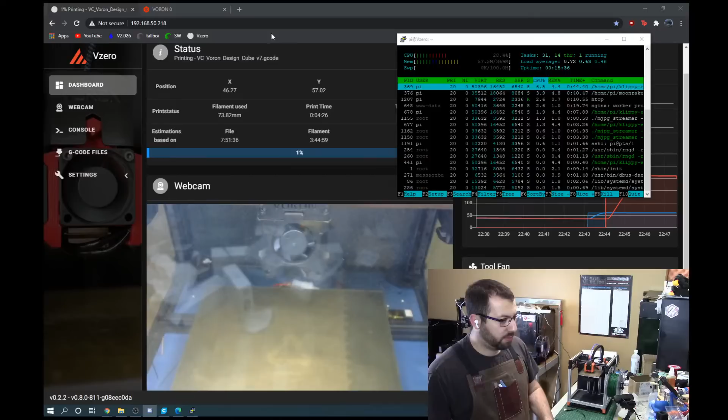So yeah, so this is good, so this... Now, I would love to see a Raspberry Pi Zero on a V2 running 7 motors with a 1080p stream, see how it's handling. So okay, so we just had to jump to 37%.

What am I doing? What am I doing? Put the stream back up so I can see what you guys are saying.

Yeah, they need to update the Pi Zero. Like, it's so... For what you need, you don't need much for some things, but...

Jetson Nano with an NVIDIA GPU. I don't think I need to run machine learning, because then it could self-tune. Because right now we can kind of already do that with input shaper and accelerometers, but you need a separate Raspberry Pi for that.

Yeah, this originally had a Pi 3 in it, and my Pi Zero sat on top of Tallboy here, just running a webcam so I could watch it, because this guy runs RepRap firmware. So I need to put the Pi 3 in this guy now and actually convert it to Klipper. So.

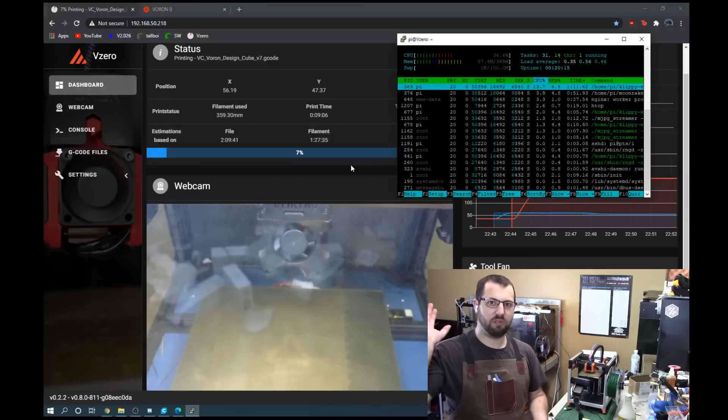So, but yeah, Cura, you have to play around with the settings to kind of get it right. And what I tend to do is just stick with whatever version I know works. Like I'm still on 4.5. I haven't upgraded to the newer versions because they like to introduce bugs and shit. So I just stay a few revisions back, and I've never had an issue, really.

So, I don't know, I have no issue with Cura. It works, you know, it's a Voron. I'm sure I could load up Cura 15.2 from way back in the day that shipped on the Monoprice Select Mini CD drive or whatever, and it'll work just fine. Everyone has their slicer of choice. I see no point in getting bent out of shape about it.

But yeah, so we are sitting at, I haven't seen this spike above 37% so far. I wish I could skip ahead in the print, but it's already doing infill at near max speeds for this print. So yeah, I think we're okay there.

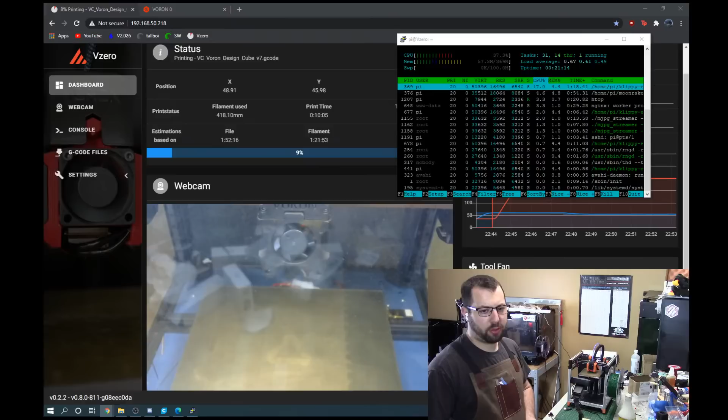Yeah, their newest, honestly with Cura I never jump up whenever they jump up. I wait a little bit usually, wait a while, don't go to 4.7, go to 4.7.1 or something like that. But I just stick on 4.5 for now. But yeah, so okay, I think that's enough testing for now.

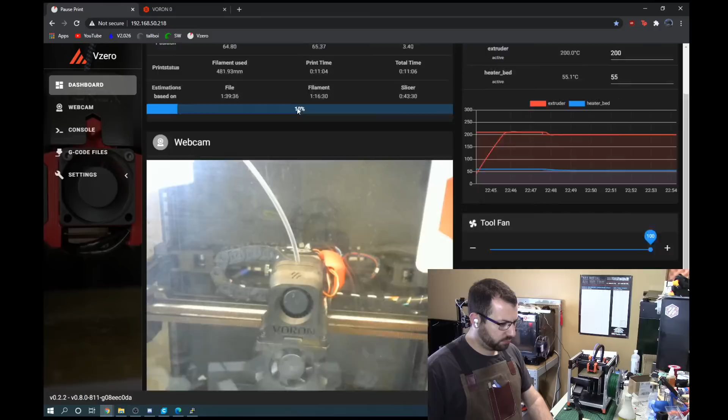Okay, so I'm going to cancel the print because I've got enough of these guys. So that's good to know.

So, does anyone have any questions? We got a couple minutes left here. I know we went on a little bit of a tangent there with some webcam testing, but that was fun. So now we have learned that we are okay with webcams on a Pi Zero, at least for now. If you try to bump it up to 1080p or something, we might have an issue, but right now it seems to be okay. So we should be good there.

What is the cost of a V0? So depending on your location in the world, it's about $400 to $600 USD to build.

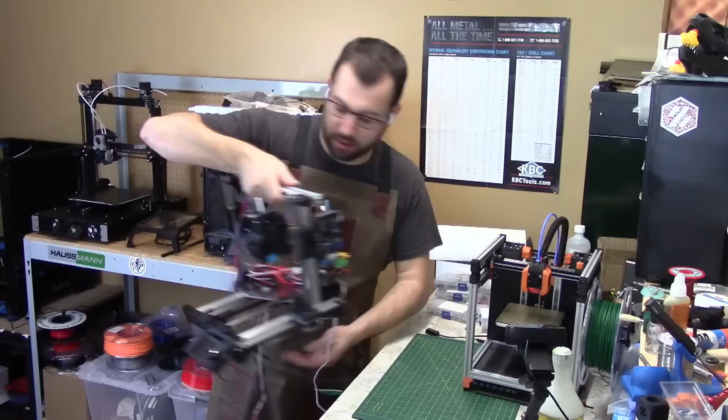Because as much as you guys would love me to probably play the Song of My People with some RAMPS, A4988 action, I'm sure you really don't want to deal with that - it's 2020, we're past RAMPS. Okay, it almost fell, but it didn't. Okay, so crappy i3 it is, probably.

Did I watch the VRRF? No, unfortunately I missed most of it. It was Canadian Thanksgiving weekend this weekend, and I had a wedding to go to, so that's why I didn't stream. I was pretty much out and about.

Funny thing, Chris - that thing has the same build volume as the Vzero. Actually, it's slightly bigger in the Y, I believe.

Yeah, a few companies did mention Voron, but I didn't watch anything. Was there anything big that I liked?